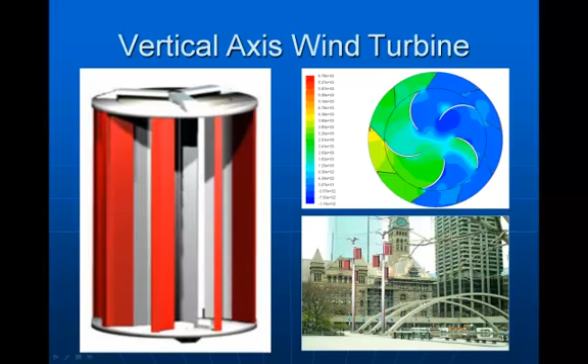Also, wind power would fit into the sustainable envelope. Here's a picture of a device, a vertical axis wind turbine that we've done research on at my university. It could work into an urban community as shown in the bottom right with the old City Hall in Toronto in the background. And in the upper right we have pressure distribution curves where we're analyzing the technical behavior and efficiency of the device, trying to improve it.

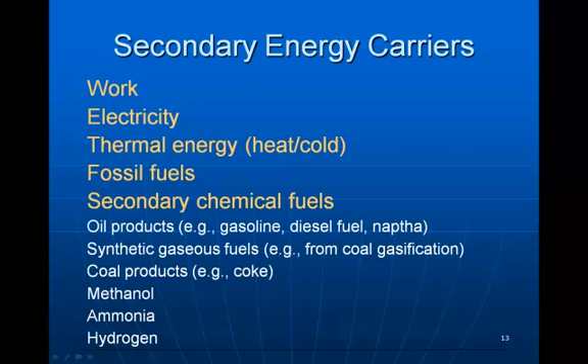There are many secondary energy carriers shown here: work, electricity, thermal energy, be it hot or cold, fossil fuels, secondary chemical fuels, and in that category there are many, as shown in white, including at the bottom hydrogen. The hydrogen economy has received a lot of attention recently, so I'd like to amplify on it a little bit.

What we have is a hydrogen economy based on a very simple concept that we can ultimately use renewable energy sources at the bottom here to achieve at the top useful energy services or useful energy products. To do that, we have a closed cycle in which we produce hydrogen typically by taking water from the environment and splitting it to hydrogen, which we will use, and oxygen, which we can either use as a byproduct or return to the environment. The hydrogen can be transported and stored before it is ultimately used to produce that useful end product or service.

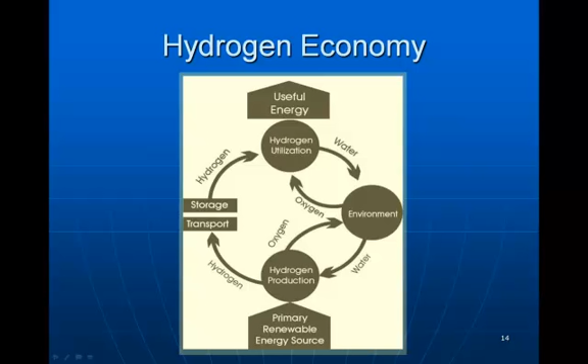The resultant of oxidizing hydrogen is water. We take oxygen in to do that. That oxygen can come from the environment where we put the oxygen from splitting water, and the water returns to the environment to be used again. The benefits of the hydrogen economy are that we have an energy carrier, chemical in nature, that complements electricity, our non-chemical energy carrier, and together those two carriers allow us to satisfy many of the needs of society from an energy perspective.

The third requirement of energy sustainability is increased efficiency. If we can do more with less, we can stretch the reserves. And by efficiency, I don't just mean simple efficiency of a device, but rather, yes, device efficiencies, but also system efficiencies, better energy management, where you try to control the energy flows in a system so as to achieve higher efficiency and maybe reduce demands instead of increasing supplies.

Also, better matching of supply and end use, that is, if all you need is warming a house at 20 degrees centigrade, perhaps you can find waste heat from industry at 50 degrees centigrade to do that instead of burning natural gas at several hundred degrees to achieve that same use.

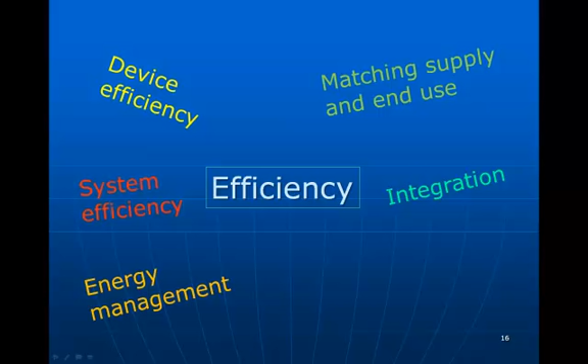Also, better integration helps with efficiency, and that might be designing, say, a city to allow transport hubs to be energy efficient, to minimize distances that people travel, to keep industry together where wastes from one industry in an energy sense can become inputs to another. Finally, design of systems for using energy more efficiently or being more energy efficient overall is part of efficiency from my perspective.

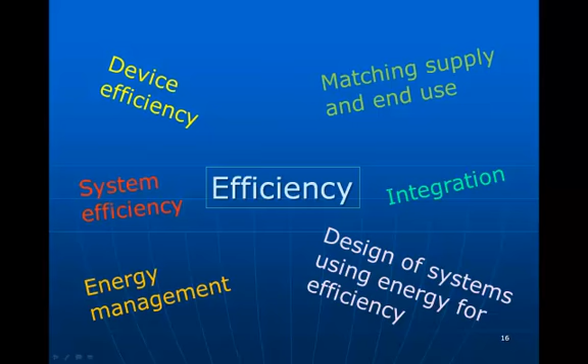Exergy analysis is an advanced tool based on thermodynamics, particularly the second law of thermodynamics, that allows us to assess and improve efficiency. Exergy is a measure of energy quality, something we often neglect when we deal with energy quantities only. It's a non-conserved quantity. Energy quality is degraded every time we do something with energy, whereas energy quantity is actually conserved. And exergy analysis allows us to determine meaningful efficiencies, that is, efficiencies that always tell us how nearly we approach true ideality or physical perfection. Energy efficiencies don't always do that.

Exergy analysis helps identify the real losses that detract from perfect efficiency, and by doing that, it identifies for us the true improvement potential of an energy system. So it's a very useful tool. But let me try to illustrate how it might work. As a system, let's consider not just an engineering device, but the whole planet. The planet is basically in balance.

We have solar energy from the sun coming in at the upper right to the Earth, which is a high exergy form of energy, high quality. Going out at the bottom right is thermal energy, in quantity equal to the solar energy coming in. But that carries low exergy because it's at a lower temperature than the energy coming in from the sun. The net result from an energy perspective is that the Earth gains as much energy as it loses. So it's hard to imagine what its efficiency is.

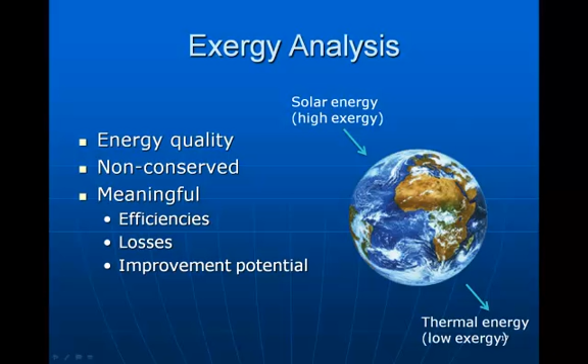So exergy is used in driving the processes on Earth. Energy analysis doesn't tell us much about this picture. You can substitute for the Earth any device and you get a much better, clearer picture of its performance and efficiency using exergy analysis.

Now exergy is nothing new. There is increasing recognition. I co-authored a book several years ago on exergy with my colleague Dr. Ibrahim Dincer, and we together started a journal, the International Journal of Exergy, almost a decade ago, and it's thriving with lots of papers about applications as well as methodologies in exergy analysis.

As well, environmental impact can be reduced with techniques like carbon capture and sequestration, in which we, instead of releasing carbon dioxide to the atmosphere, capture it and try to store it somewhere, avoiding greenhouse gas emissions.

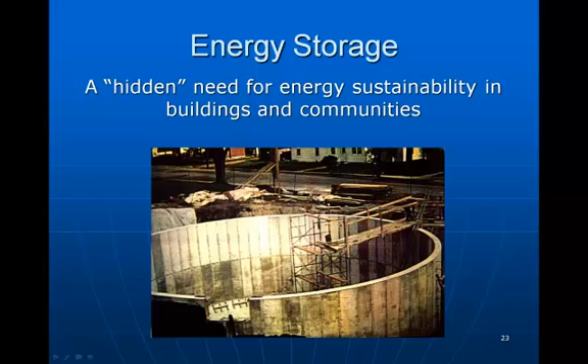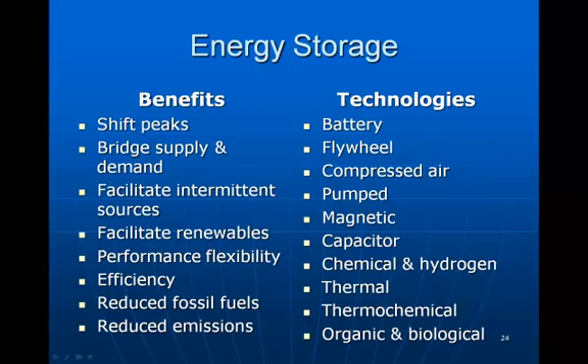As I've illustrated there for solar energy, storage is very important to being able to use intermittent energy sources, as many renewable energy forms like solar and wind are. I won't go through energy storage in detail, but I put this here to point out that there are many benefits listed on the left of this slide to energy storage, beyond just facilitating renewable energy sources. As well, there are many technologies that allow us to store energy, some of which are commonplace like batteries. Others are more in development in hopes of providing more efficient energy storage in the future. All will help towards energy sustainability.

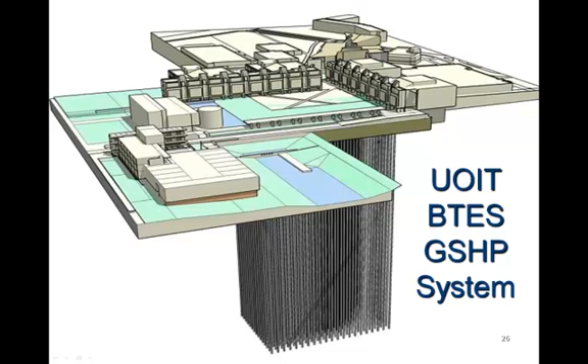Similarly, cooler fluids can be put into the wells, stored in the rock and soil mass, and the coolness can be extracted for use in air conditioning buildings at a later time. So this is the UOIT, University of Ontario Institute of Technology, borehole thermal energy storage system hooked up to a ground source heat pump, GSHP, that facilitates the workings of the storage system.

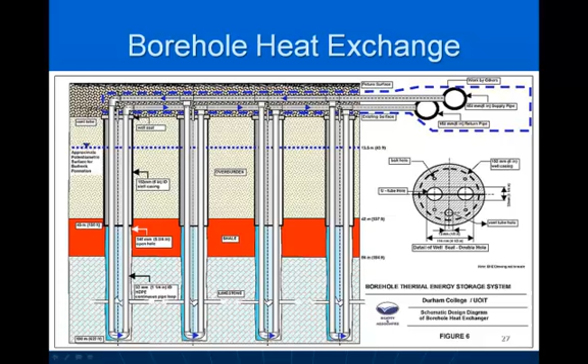Looking at 4 of those 400 tubes in detail, we have fluid coming from the buildings or the heat pumps going out to a tube through a header, going down 200 meters, back up, and returning to the system in 400 different tubes. The ground in which these are located has, in this beige section here, about 40 meters depth of overburden. Then we turn to rock. We have about 20 meters of shale, and the next 140 meters is limestone rock in the ground.

The economics of the borehole thermal energy storage system at my university are quite impressive. We have direct savings of about 40% on heating costs and 16% on cooling costs. Other indirect savings also accrue.

We didn't need to pay for a boiler plant, and we don't pay for the associated potable water and chemical treatment that requires, and we don't pay for the rooftop cooling towers and the structural supports in the buildings that are needed to accommodate them. As a result, the payback period for the system is about 5.5 years.

The high-efficiency HVAC equipment has a payback that's quicker, about 3 to 5 years. The borehole well field with the 400 holes is about 7.5 years payback. The main challenge is that although you save money over time, you have to pay the money up front. There's a larger initial cost, and that dissuades a lot of people from putting in such sustainable energy systems.

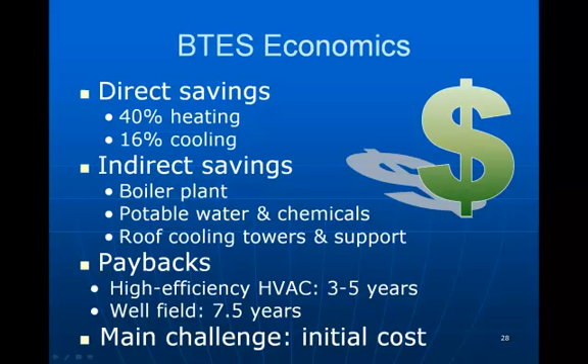Another aspect of sustainable energy buildings is net zero energy buildings. One is shown here that is based very much on solar energy as a primary input. Here you have photovoltaics on the roof producing electricity and solar thermal collectors producing heat for heating the building.

You also have passive solar design where you have windows that allow sunlight in when you want to warm the building and have blinds that would shut and stop that sunlight during periods when you don't want to be heated. There's active and passive thermal storage in there, a heat pump system that's heating and cooling the building in conjunction with the ground energy system.

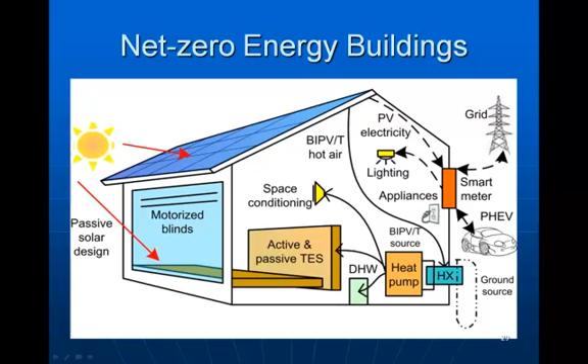The electricity from the photovoltaics can run lights and appliances, as well as be sold to the grid. As well, it can charge transportation vehicles like a hybrid electric vehicle that runs partly on electricity. The net result of this type of building is that it uses as much energy as it produces, making it a net zero energy user over the entire year.

In Canada, we've begun a major research initiative in support of net zero energy buildings. We've created the NSERC Smart Net Zero Energy Buildings Strategic Research Network, which links about 15 universities and almost 30 professors. The project just started.

All of this research is aimed at making smart net zero energy buildings a reality in a large way in Canada over the next 10 or 20 years. On the community side, here's a diagram of a community integrated energy system. This is the Drake Landing Solar Community located south of Calgary in Alberta, Canada.

In this system, we have solar collectors located on garage rooftops for 50 or so houses that are in this community, the larger community having about 300 homes. Heat from those collectors, thermal collectors, goes into a short-term energy storage system, hot water tanks, and is then put into the ground with a borehole thermal energy storage system.

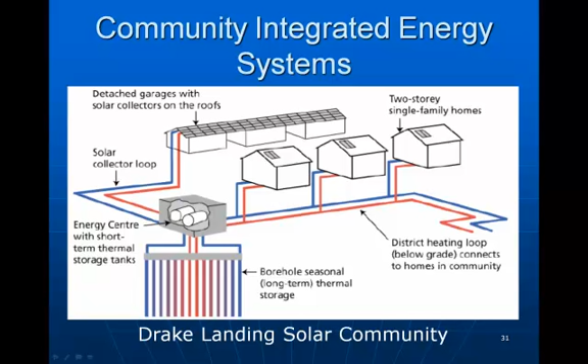When the heat is needed for the homes, it's sent through a district energy grid to each home, and colder fluid returns to pick up more heat from the storage or the collectors. Each home has a small solar collector on it used for domestic hot water heating.

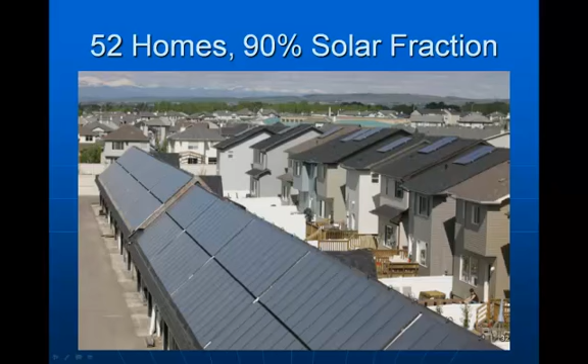Here's a photograph of the system. You can see the Rocky Mountains in Canada in the background. These are the garages with their solar thermal collectors for space heating, and these are the homes with their small hot water solar collectors. These 52 homes have managed to achieve a 90% solar fraction. That is, 90% of their energy needs are met through solar energy.

The electricity would help run our cities, lighting, appliances. There may be electrical vehicles like buses as well, and all told we end up with very clean cities that are sustainable. The energy services are provided at a distance from the city in clean ways.

And that brings me to the end of my talk. As a closing, I want to emphasize that I think sustainability is truly essential, not just for an individual country like Canada, but for the entire planet. Energy sustainability is a critical quest in the overall seeking of sustainability. And finally, buildings and communities are a key part of that.

In Canada, for instance, building energy use makes up about 30% of the national energy use. So getting sustainable energy use right in buildings and communities certainly goes a long way towards overall sustainability.